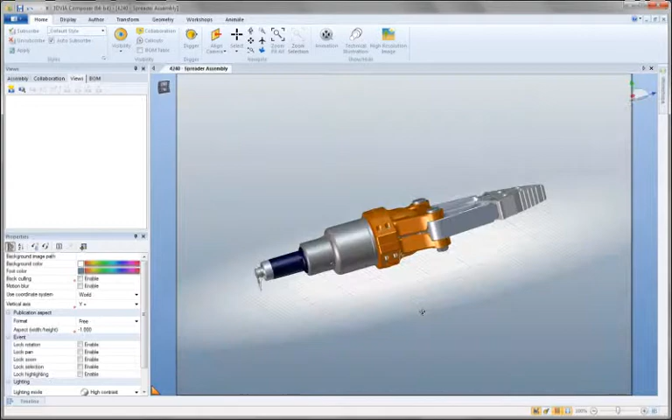Let's start by looking at creating documentation for the Holmatro spreader assembly designed in SolidWorks. 3DVIA Composer can work with your native 3D engineering data. Accessing the models is as easy as File Open. Time is saved because no translation is required and the intelligence of the model is preserved, including the design hierarchy.

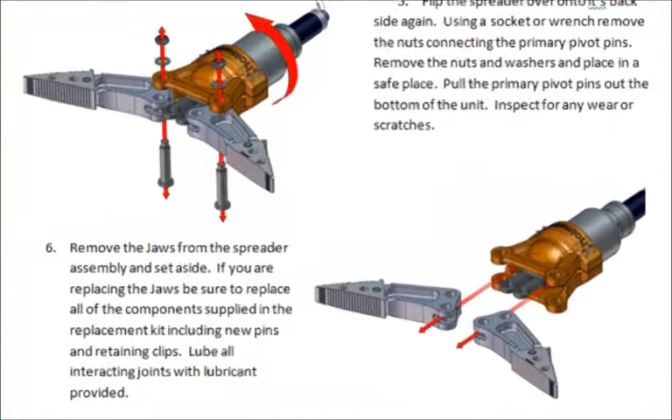We will take a look at an instruction manual already in process. This document is provided with every spreader assembly. We can see that a variety of high-resolution images created in 3DVIA Composer has been implemented within this Microsoft Word document. However, if the design changes, the documentation needs to stay up to date as well.

The creation of this manual was well underway before the design had been finished. We can see that none of the views contains the handle assembly that was recently added as a design change.

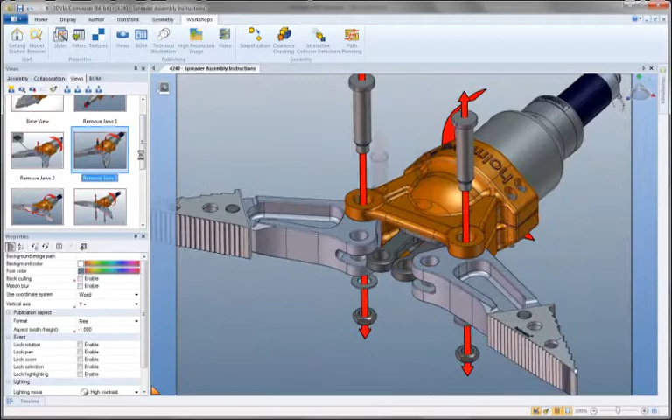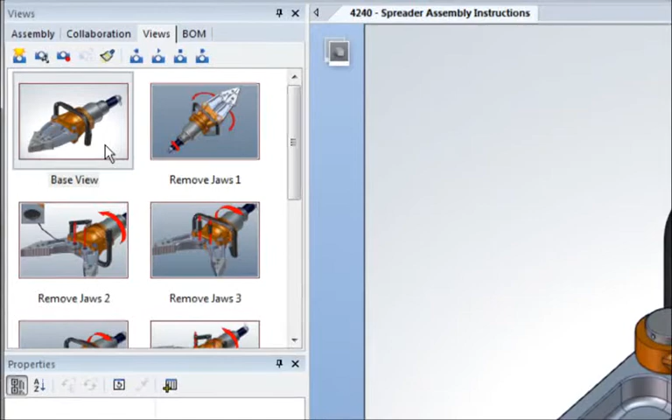Thanks to 3DVIA Composer's associativity, we can see how a change within the engineering software will affect the work in progress. As the design change is made, the documentation can be made current with a simple update command. 3DVIA Composer will automatically refresh all of the relevant views with the new changes, keeping documentation and engineering always on the same page.

Creating the images and views is simple, with an easy-to-navigate ribbon-style user interface similar to other Windows applications. We can freely create new views as desired to describe various operations and procedures. It is easy to change the orientation of a view and manipulate the geometry into alternate positions. Here we can describe removing two screws to access the battery chamber.

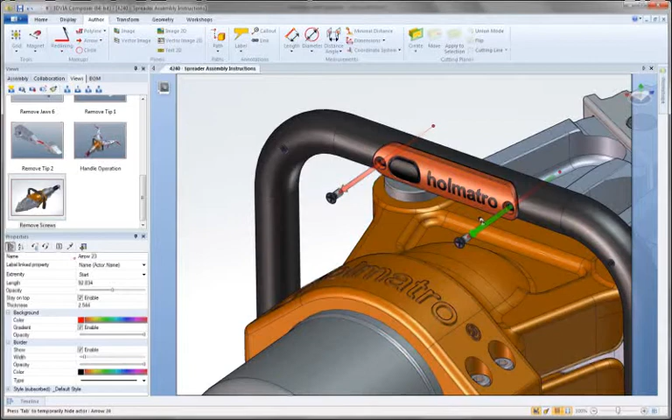To further explain the operation, you can add graphical elements, such as directional arrows. They are simple to locate and snap to geometry so placement is fast and precise. Further visual customization is possible. Arrow width, length, color, and opacity can be controlled.

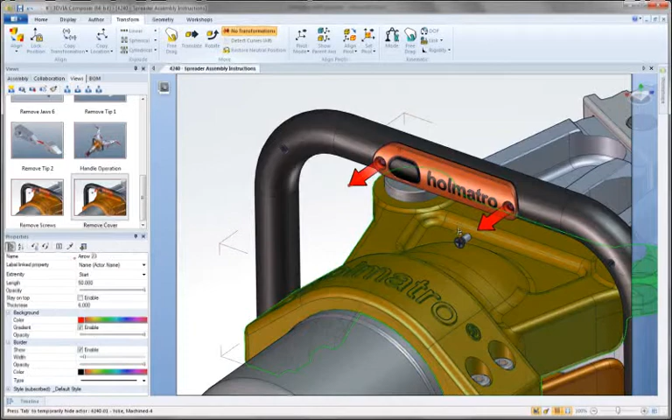Creating additional views is also easy. Here we can describe removing the actual cover and the battery. To save time, we can use the elements of the previous view to help quickly create this new image. 3DVIA Composer allows us to quickly hide any unneeded components and elements, and then utilize the same tool sets to describe the new operation.

Once all of the images are complete, 3DVIA Composer's high-resolution image workshop can be used to quickly export all of the images created in this project. These include all the views that were updated with the new handle component, as well as our new battery replacement images.

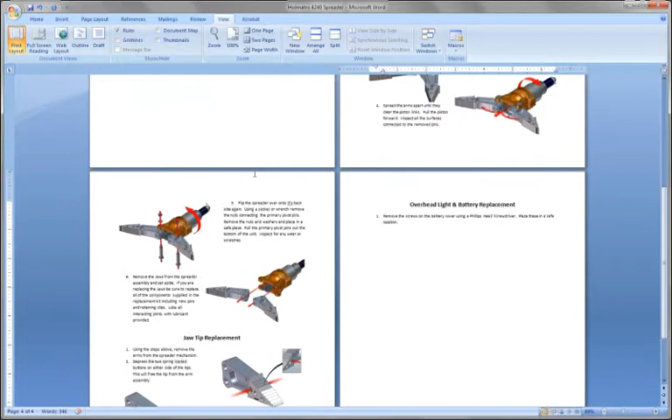Whatever tool you use for publication, it most likely has capabilities to keep all its assets up to date. In the case of Microsoft Word, you simply need to update all of the external links inside of the document to reflect the most recent engineering changes.

We now can add the new image describing the removal of the battery cover and battery. Again, it's an easy process.

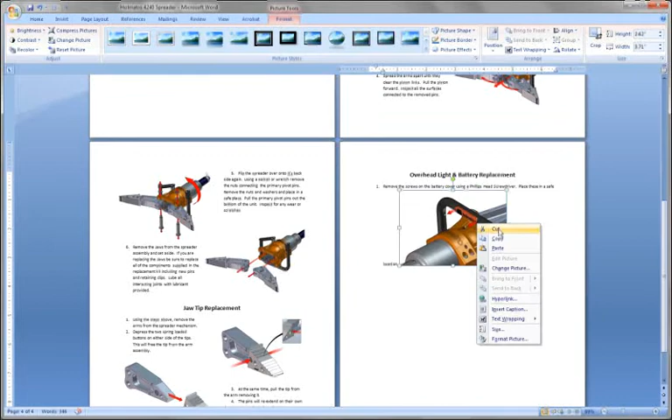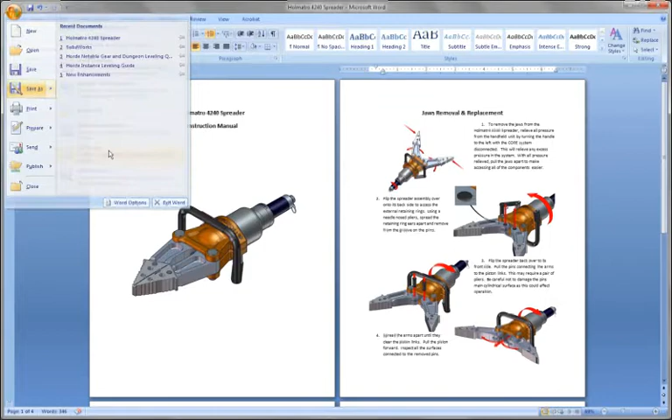Finally, we can save the entire manual as a PDF file, a nice traditional format that is common for user manuals, catalogs, and instructional booklets. It should be noted, however, that with 3DVIA Composer, we can take technical communications beyond traditional formats and create compelling interactive experiences.

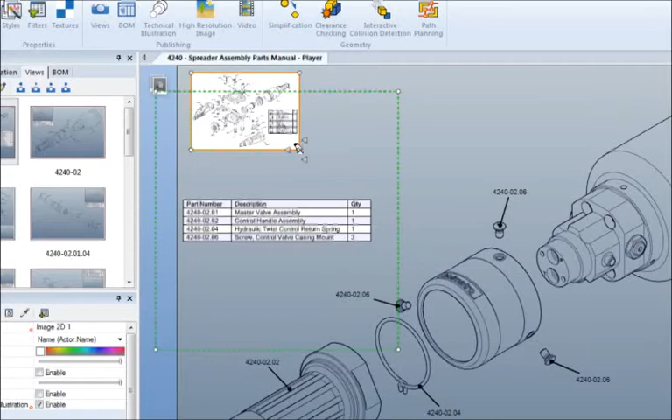In the case of an online part manual, we utilize 3DVIA Composer's intelligence to include an interactive bill of materials. We can hyperlink components and create dynamic panels. For example, to return a user to the top-level assembly view, we can utilize a small image as a virtual back button.

Navigation is aided by rich graphical content. 3DVIA Composer can save all images in a scalable vector format, so they will preserve their clarity at any size in which they are used.

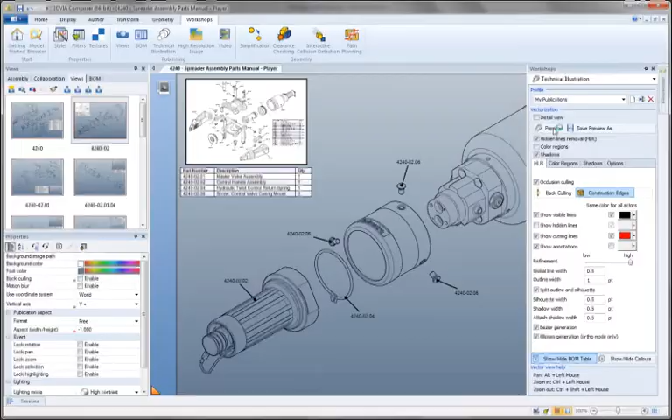Therefore, the online parts catalog can be created simultaneously with the instruction manual, and most importantly, can be created in parallel with the product development process. Any changes to the design can be automatically propagated throughout all of these compelling deliverables.

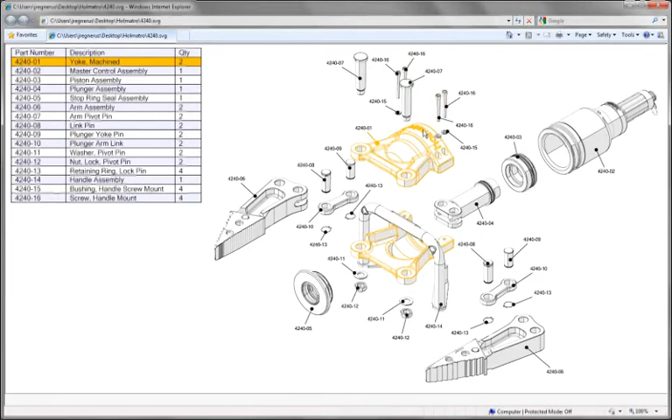If you're creating paper documentation, online experiences, or simply wish to further your organization's technical communication capabilities, 3DVIA Composer is the perfect solution. This has been your first look at 3DVIA Composer.